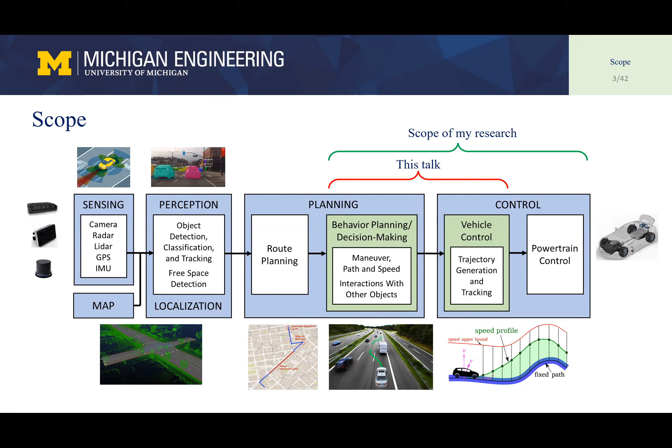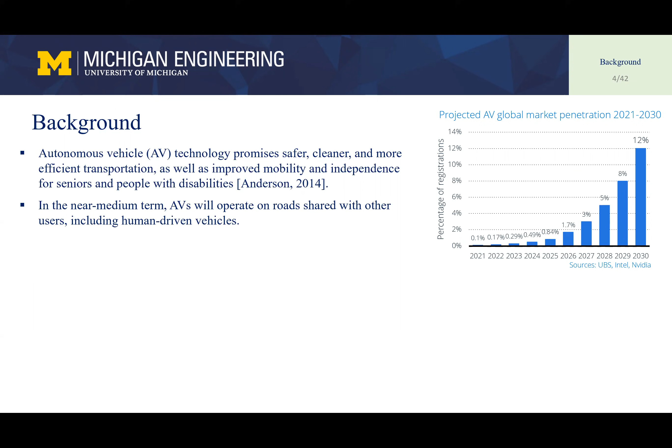Firstly, as background, autonomous vehicle technology promises to bring safer, cleaner, and more efficient transportation, as well as improved mobility and independence for seniors and people with disabilities. It is projected that in the near to medium term, autonomous vehicles will operate on roads shared with other users, including human-driven vehicles. In this case, the complexity and uncertainty due to extensive interactions among road users necessitate advanced decision and control systems that can properly account for these interactions to ensure safe and effective autonomous vehicle operation.

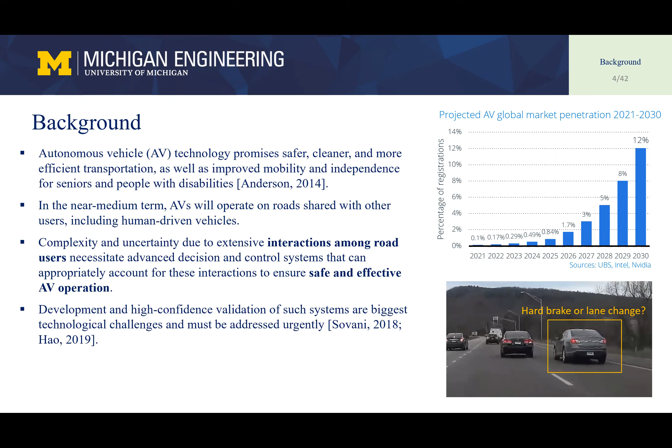Meanwhile, the development and high-confidence validation of such systems have been recognized by the automotive industry as among the biggest technological challenges and must be addressed urgently. In this talk, we will discuss game-theoretic methods for autonomous vehicle control. Firstly, game theory is the study of strategic interaction among rational decision makers, and we will apply game theory to study and model driver interactions in traffic scenarios involving multiple vehicles.

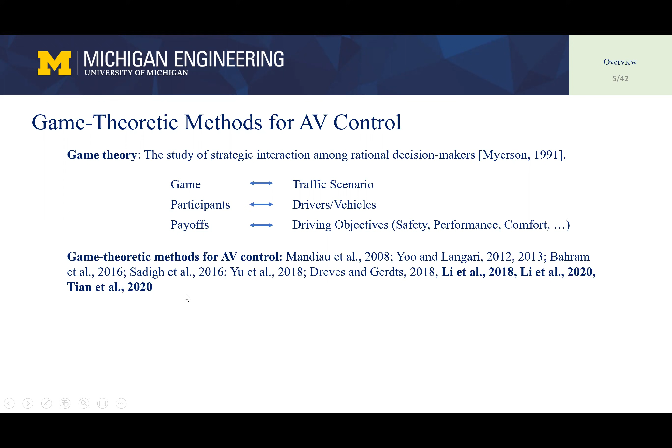Indeed, game-theoretic methods for autonomous vehicle control have been investigated by several researchers in these publications, including some publications from our group. Game-theoretic methods have several advantages, especially compared to pure data-driven or learning-based methods. Firstly, game-theoretic methods can typically lead to solutions that are interpretable, because these methods are based on mathematical formulation of the problem with certain psychophysical interpretation.

Secondly, game-theoretic methods can typically lead to solutions that are effective for a range of scenarios. In contrast, pure data-driven or learning-based methods typically lead to solutions that are effective for the specific scenario of the data set. And lastly, game-theoretic methods are typically data-lite, which means these methods usually require less data compared to pure data-driven methods. This is important because it has been reported that multi-vehicle interaction scenarios in released traffic data sets are insufficient, and this fact largely limits the practical application of data-driven methods, but in this case, game-theoretic methods can be applied.

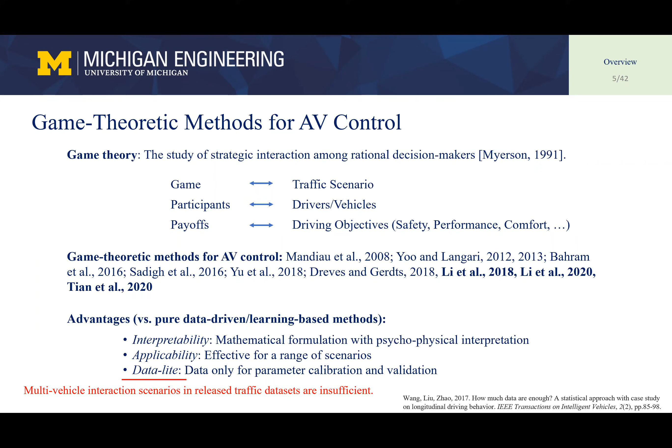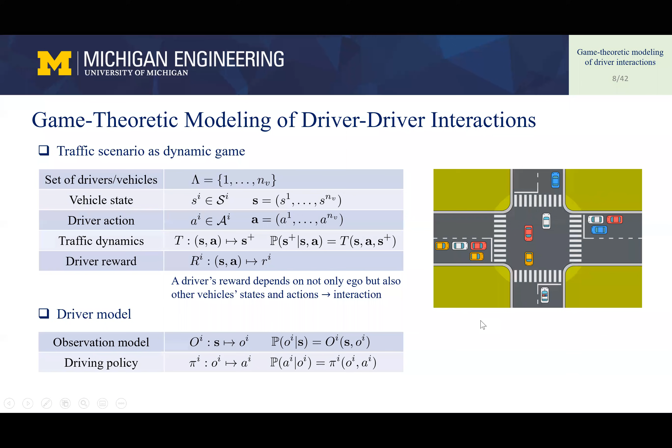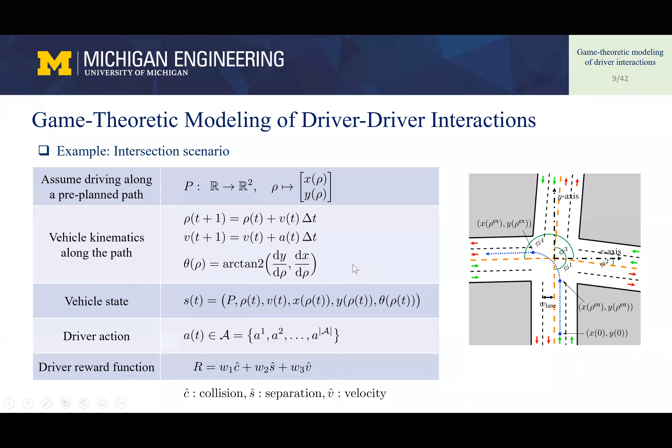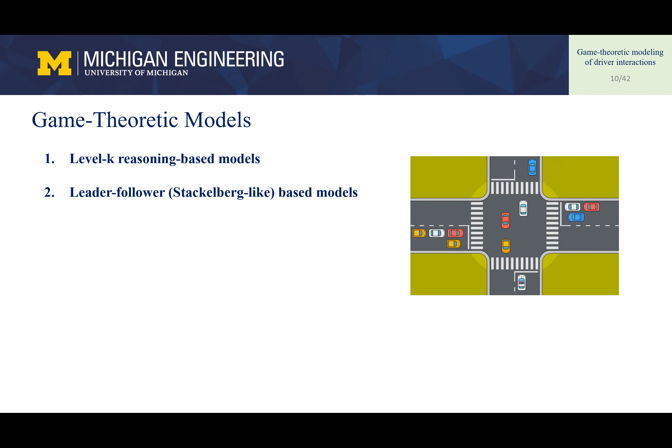All right, then let's discuss some specific game-theoretic models. In this talk, I will introduce 2 modeling methods. The first one is called level-k reasoning-based models, and the second is called leader-follower-based models, or Stackelberg-like models. I will introduce these 2 one by one. First, the level-k reasoning-based models.

Level-k reasoning is a behavior model describing human behavior in interaction scenarios. In level-k reasoning theory, human behavior is classified according to levels of reasoning. In particular, a level-k agent behaves as if she best responds to the belief that all the other agents are level k-1. So in short, a level-k agent optimally responds to level k-1 other agents. So this is the k assumption in level-k reasoning theory.

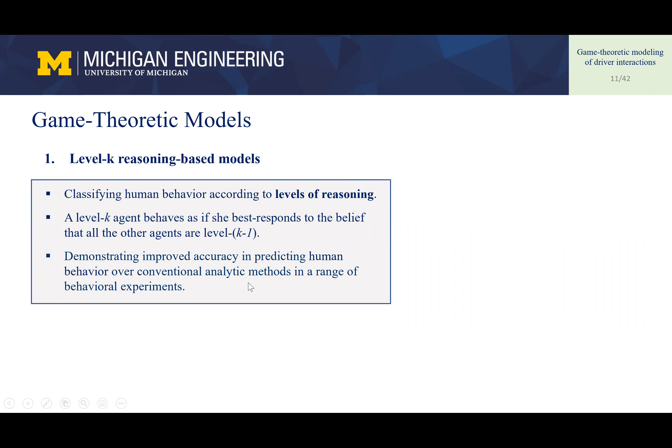Level-k reasoning theory has demonstrated improved accuracy in predicting human behavior over conventional analytic methods, including, for instance, Nash equilibrium-based methods in a range of behavioral experiments. Let's take this simple intersection scenario involving two interacting vehicles as an example. At first, vehicle B may choose to maintain its current speed and go through the intersection first. So this thought represents a reasonable driving behavior, but without really accounting for the interactions between these two vehicles. And this thought can be classified as a level 0 behavior.

Then A may think B will go first, and in this case, I should yield to B. And this represents a best response to the level 0 behavior of B and can be classified as a level 1 behavior. And B may continue to reason and think A will yield to me, and in this case, I can go ahead of A safely. And this thought represents a best response to the level 1 behavior of A and can be classified as a level 2 behavior.

So effectively, level 0 represents reckless driving behavior, i.e., reasonable driving behavior, but without really accounting for vehicle interactions. Then, as the best response to such reckless driving behavior, level 1 represents cautious or conservative driving behavior. And then, as the best response to level 1 behavior, level 2 represents relatively aggressive driving behavior.

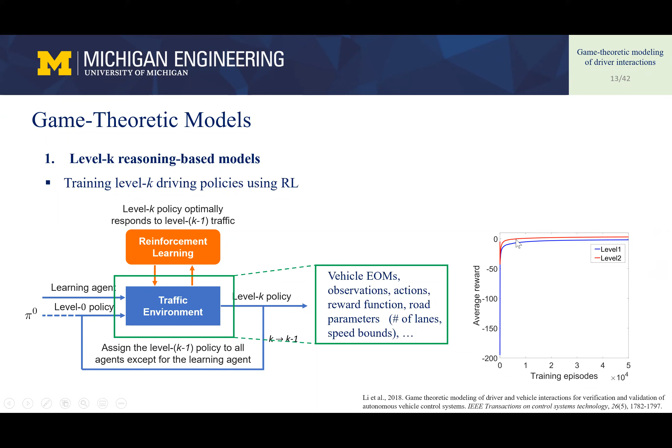And once we have level 1, we can feed it back into this traffic environment, i.e., we let all the vehicles in this environment be now controlled by this level 1 policy, put another learning agent in this environment, use reinforcement learning to train it, and obtain a level 2 policy. So following this loop and this iterative procedure, we can construct or obtain level K driving policies for K equal to 1, 2, 3, up to arbitrary level in an iterative and sequential procedure. This plot here shows the training results of level 1 and level 2 driving policies.

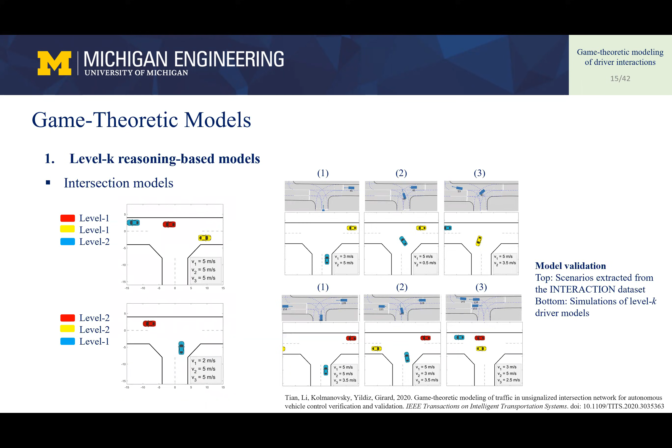All right, then let's move to the second modeling method, which is leader-follower based models. The motivation for this method is that in many traffic scenarios, a driver's behavior is dominated by her intention, whether or not to yield the right of way to others. For instance, at an intersection, which car goes first depends on their drivers' intentions to proceed ahead or to yield the right of way. And similarly, for highway merging scenarios, which car goes first usually depends on their drivers' intentions to yield. And motivated by such an observation, we exploit the leader-follower asymmetry in Stackelberg game theory to represent drivers' intentions. And in general, a leader represents a driver who intends to proceed, i.e. not yield, and a follower represents a driver who intends to yield.

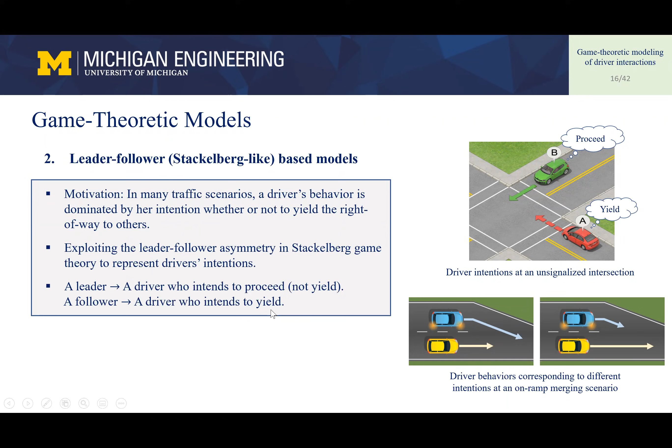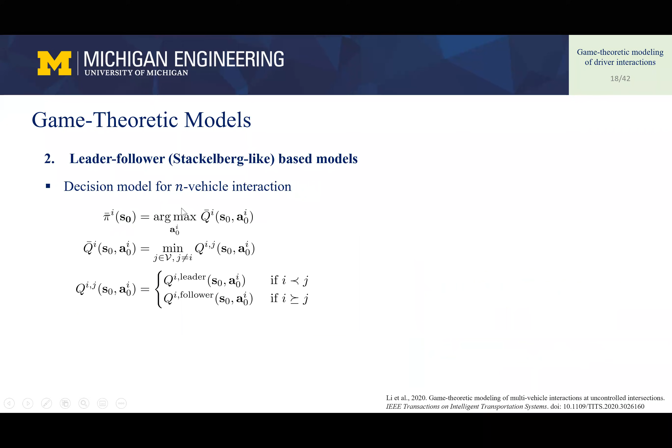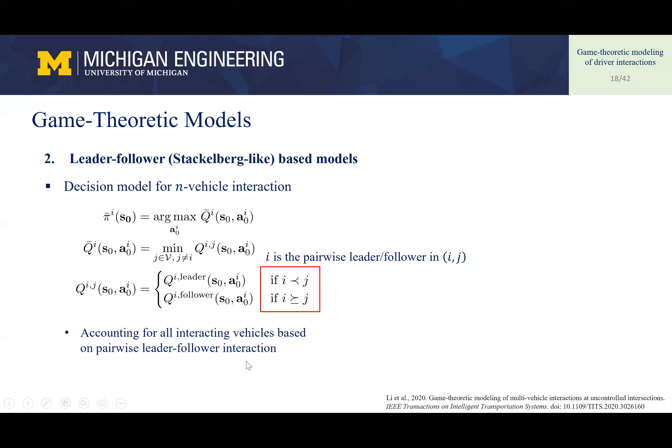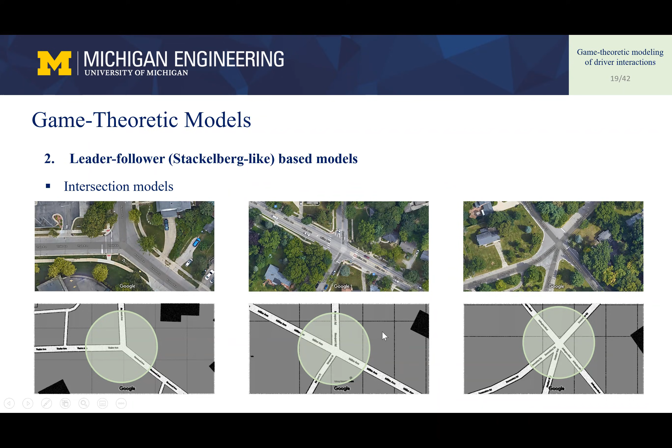Then we can extend the models to n vehicle interactions using this set of equations. Here, this i smaller than j represents that i is the pairwise leader in the vehicle pair ij, and i greater than j means i is the pairwise follower in this pair. And this model here accounts for all interacting vehicles based on pairwise leader-follower interaction. And using this model, we can successfully model and simulate the interaction among multiple vehicles. And here there are some pictures showing several real-world intersections in Ann Arbor, and we can reproduce these intersections in the simulation environment and use our leader-follower based models to simulate vehicle interactions at these intersections.

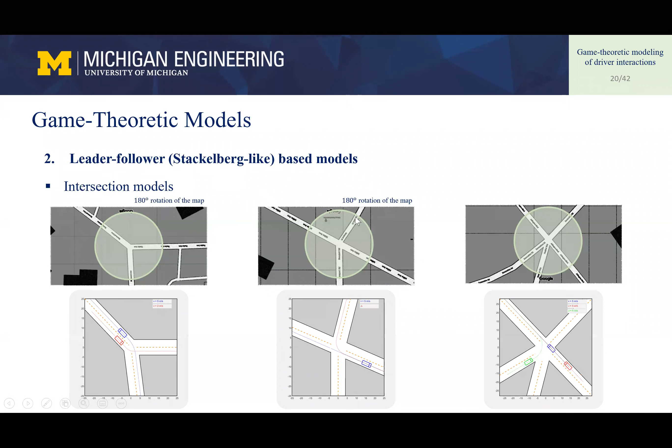All right, so we have introduced the LevelK reasoning-based approach and the leader-follower based approach for modeling driver interactions. Let's now compare these two methods. Firstly, LevelK models focus on the representation of the heterogeneity of driver behavior due to different driving styles. Recall that level 0 represents reckless driving behavior, and level 1 as the best response to such reckless driving represents cautious and conservative driving behavior. And as the best response to level 1, level 2 represents aggressive driving behavior. And in this case, the LevelK models may be most suitable to be used for scenarios where a driver's behavior is largely influenced by her driving style, such as on highways.

In contrast, the leader-follower based models focus on the representation of the heterogeneity of driver behavior due to different interaction intentions. Recall that a leader represents a driver who would like to proceed, not yield, and a follower represents a driver who would like to yield.

And in this case, the leader-follower models may be most suitable to be used for scenarios where a driver's behavior is dominated by her interaction intentions, such as at intersections or forced merge scenarios. Combination of both methods may lead to further improved models, and this is being currently investigated.

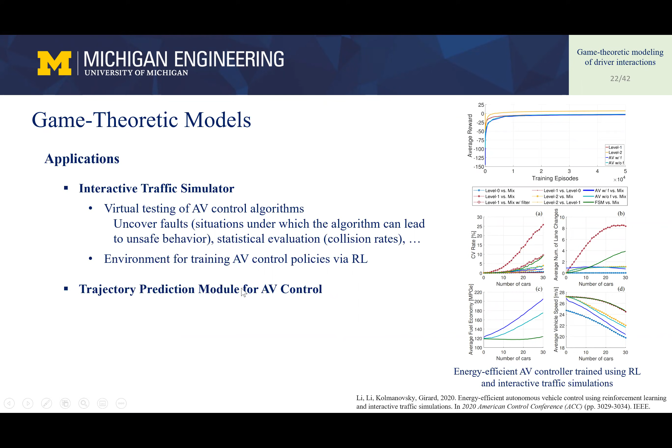And lastly, such models can also be directly used in trajectory prediction modules of autonomous vehicle control systems. And I will discuss this application in more detail in the second part of this talk, which is interaction-aware autonomous vehicle control.

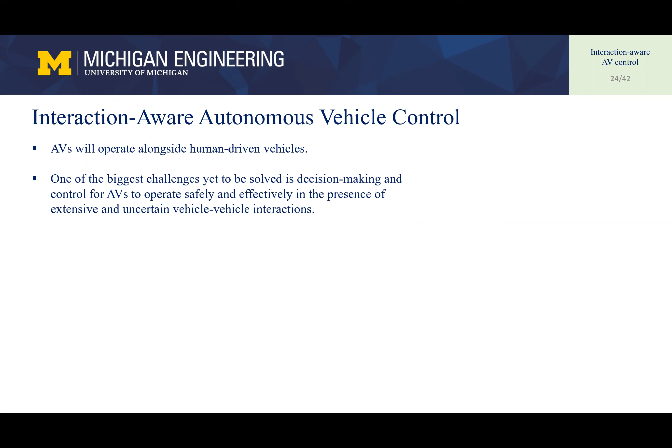Recall the background. Autonomous vehicles will operate alongside human-driven vehicles, and one of the biggest challenges yet to be solved is decision-making and control for autonomous vehicles to operate safely and effectively in the presence of extensive and uncertain vehicle-to-vehicle interactions. This motivates the development of an interaction-aware autonomous vehicle control framework, which is based on integration of the previously developed game-theoretic driver interaction models with Bayesian inference and model predictive control.

This framework has several advantages or features. Firstly, this framework leads to control solutions that are interpretable, because in this framework, we use game-theoretic driver models for trajectory prediction. Secondly, in this framework, we online quantify interaction uncertainties and reduce such uncertainties based on observed trajectories and Bayesian inference. And lastly, and maybe most importantly, this control framework leads to solutions with an explicit probabilistic safety guarantee under such interaction uncertainties.

Firstly, we consider an MPC-based control strategy for the autonomous vehicle. The autonomous vehicle optimizes a sequence of actions to maximize the expected value of the cumulative reward over a certain horizon. So this cost function represents driving objectives. And this optimization is subject to traffic dynamics, which can be described by the transition model capital T introduced previously. And this s_t represents a measurement of the current state.

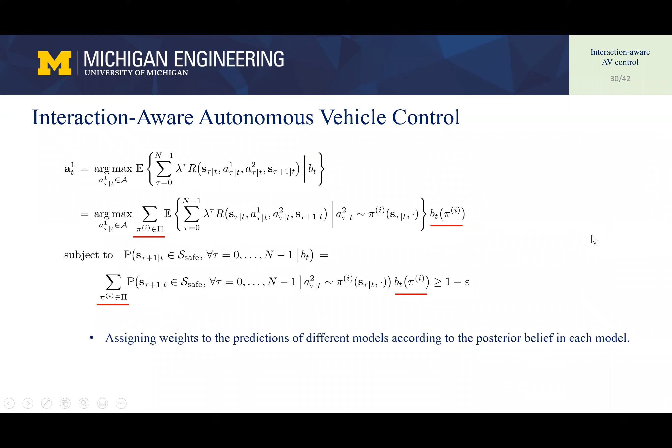Now, let's look at whether this control framework works. So for this, we consider a case study which represents a highway on-ramp merging scenario. Highway on-ramp merging is a quite challenging scenario, even for human drivers, because such scenarios typically involve extensive interaction between multiple vehicles. To implement our control approach, we consider the three nearest vehicles as interacting vehicles and assume all other vehicles drive at constant speeds.

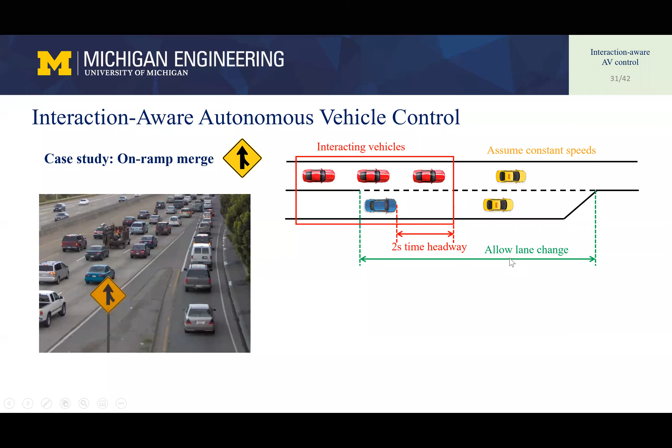We consider a reward function as a linear combination of 5 terms, which represents a penalty for collision, a penalty for going off-road, some reward for maintaining reasonable separation from other vehicles, some reward for approaching the target lane, and some reward for maintaining a reasonable velocity. We also consider some constraints on the speed and maximum acceleration.

And in our MPC problem, we consider a planning horizon which corresponds to 4 seconds of look-ahead time. And we update our decision at a frequency of 4 Hz, which means we re-solve the MPC problem and update our control decision every 0.25 seconds. And in this example, we use the leader and follower models to represent the interaction behaviors of these interacting vehicles. This means we consider a model set consisting of 2 models, which are leader and follower models.

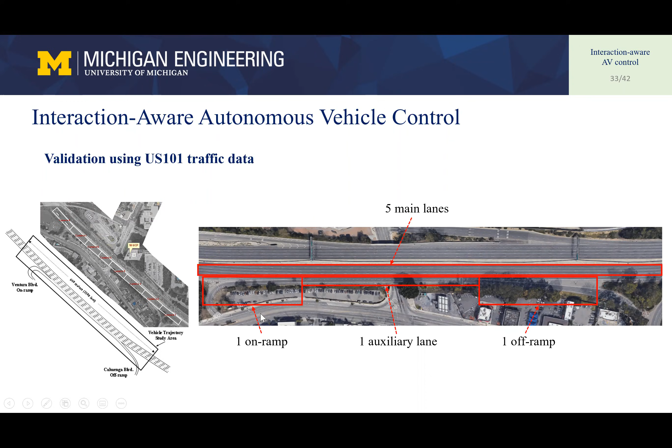So we identified in total close to 200 merges at this area, and our controller succeeded in merging in 193 cases and failed in 5 cases, which corresponds to a success rate of 97.5%. This success rate is pretty good because this data set represents quite busy traffic involving many vehicles. So this is a challenging scenario even for human drivers, and our controller can succeed in most merging cases.

In particular, our validation method is to replace the merging vehicle in the data set with a vehicle controlled by our controller and let all other vehicles drive following their original trajectories in the data set. Then let's look at some specific success cases. In this first case, the driver in the original data set decides to merge behind vehicle 2, which is probably a big truck. And our controller also decides to merge behind vehicle 2.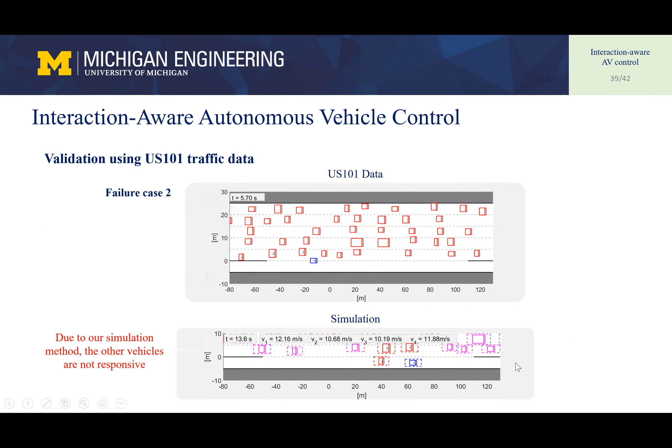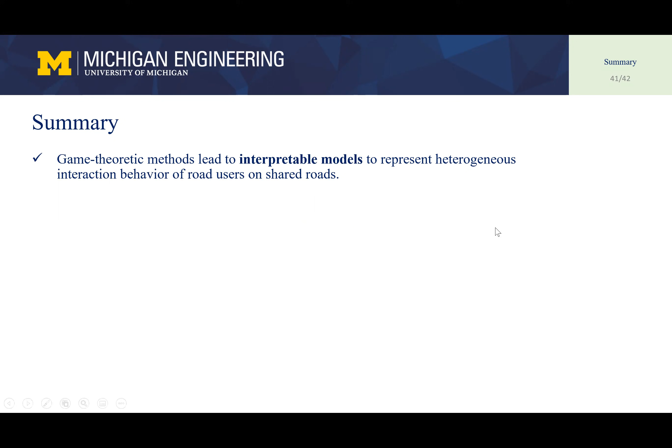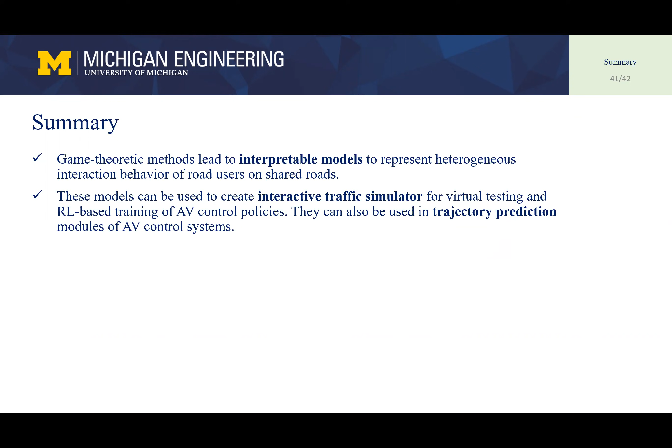All right, so we have introduced the interaction-aware autonomous vehicle control framework. Let's now try to draw some summaries. Firstly, in this talk, we showed that game-theoretic methods can be used to generate interpretable models to represent heterogeneous interaction behavior of road users, in particular vehicles on shared roads. And these models can be used to create interactive traffic simulators for virtual testing and reinforcement learning-based training of autonomous vehicle control policies. They can also be used in trajectory prediction modules of autonomous vehicle control systems.

And we have developed an interaction-aware control framework for autonomous vehicles on shared roads by integrating the game-theoretic models with Bayesian inference and MPC. And in this framework, interaction uncertainties are explicitly accounted for. And this framework leads to control solutions with an explicit probabilistic safety guarantee. And the last remark is game-theoretic methods can be quite useful, and they can also be applied to other multi-agent and human-robot interaction problems beyond autonomous driving.

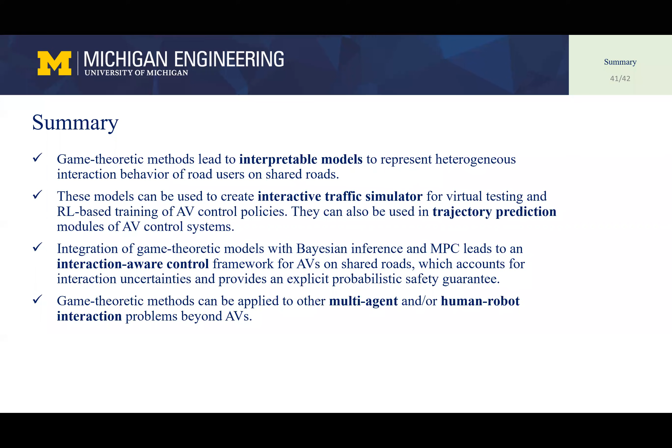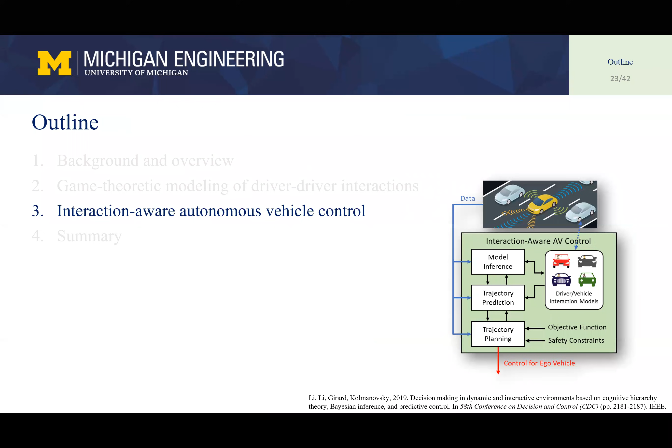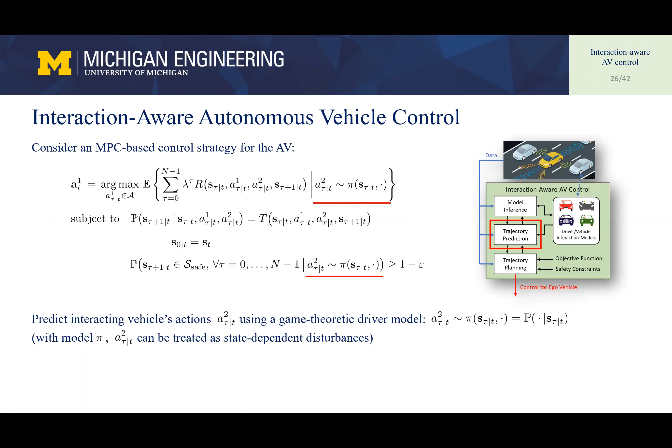Let me see. The first part or the second part? I think it was in the second part when you were showing the Bayesian update when you were doing the prediction of the trajectories. I see. This? There was another diagram, maybe, yes, here. So how do you parameterize? Yeah, I think I was referring to the next slide, but it's the same. I see. These models are represented using a neural network.

So it's basically a stochastic map from the state to the distribution of actions, and we use a neural network to represent a model, and the inputs to the neural network is the current traffic state, and the output is a distribution of actions.

But how do you discretize the space of the models, when you have the belief over the models of the others? So in this approach to parameterize the models, we do not need to discretize the space, but we need to discretize the action space. Okay, and then you put the belief on the actions. Yes.

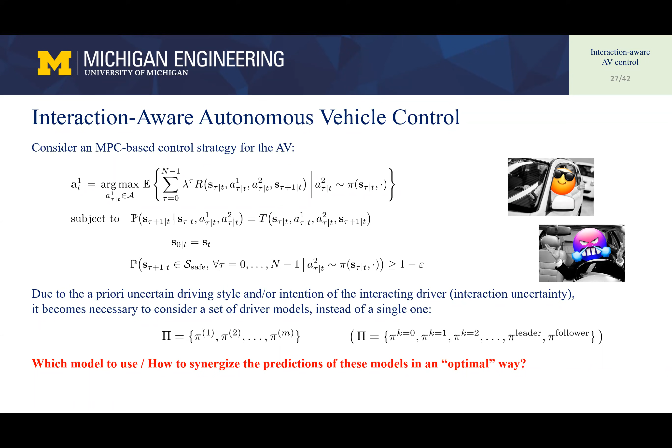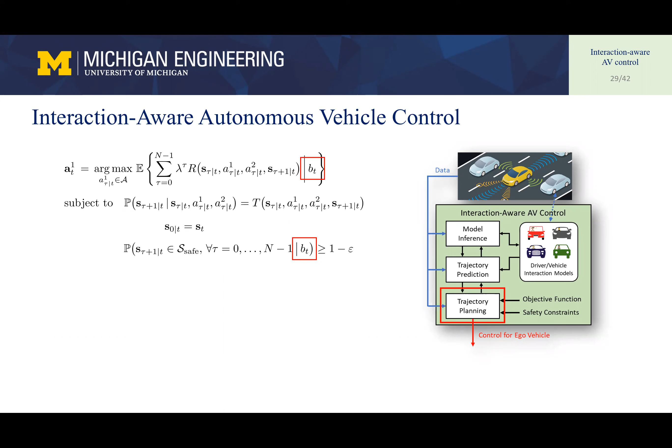Thank you. Now, the second one was really related to the last part of your talk, where you were showing this testing of the controller on passive data, which you said at the end is to some extent limiting because you're testing an interactive controller on data that are fixed or static. Yes. So what do you think could be a good testing framework for these kind of things?

So our current thought is to let the nearest vehicles that may have relatively extensive interactions with us be controlled by some other driver models, for instance, some car following models. So in our current validation approach, generating these results, we let all the vehicles follow their original trajectories, and this means they are not actually interacting with us.

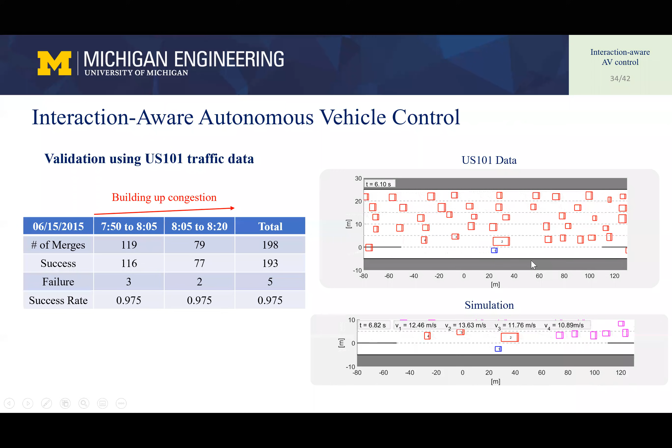But next, we would like to first initialize the scenario according to the positions and velocities of these vehicles in the data set, and then we let the nearest vehicles be controlled by some driver models, for instance, car following models, so that they can react to our actions. Okay, thank you. Yeah, thank you.

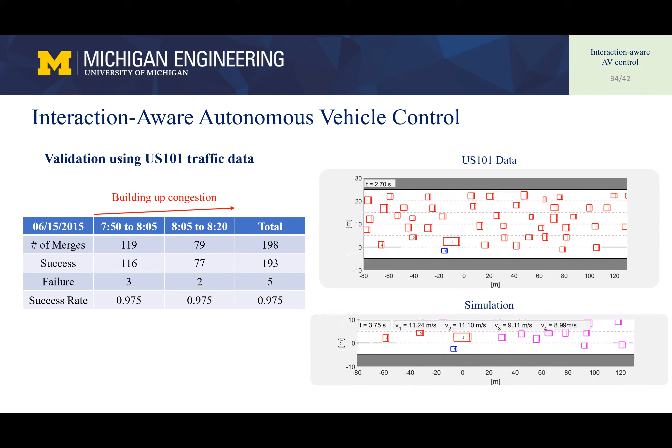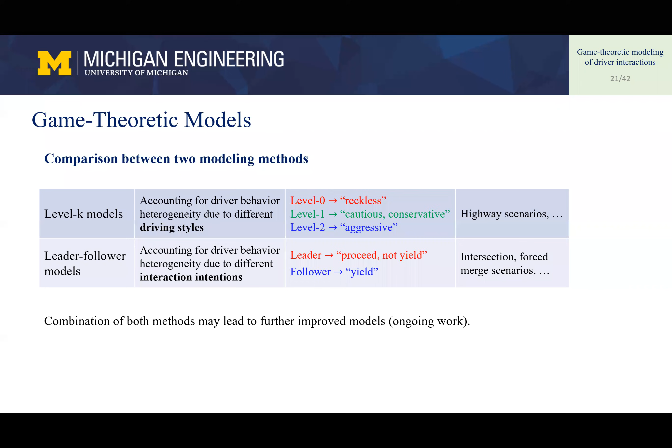Any other question? I have a question. Sure, please go ahead. In regards to the Level-K reasoning, if you can go back to that one. Yeah. So what is the difference between that and terminating best response early, like an iterated best response?

The idea is similar, but the specific solution will be different. This slide is good. So that's the procedure of how you get it. Sorry, I missed your second sentence. Can you repeat it? So this equation is the procedure of how you calculate the K-level policy. Yes. And so the Level-K policy looks like best response iterations. So can you comment on the difference?

So maybe the biggest difference is, if we look at this formula here, the actions of the interacting agents are feedback. So they take actions according to some feedback policies, which means their actual actions will respond to our choice of actions. But based on my understanding, if you do iterative... what's it called? Iterative best response on the policy level, not on the action level. So it would also be best response on the others' policies.

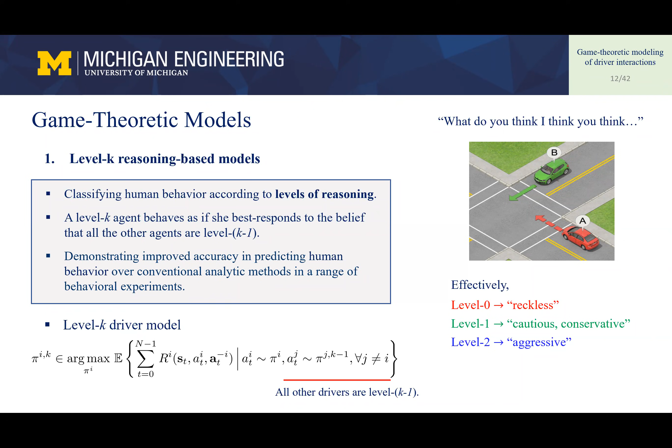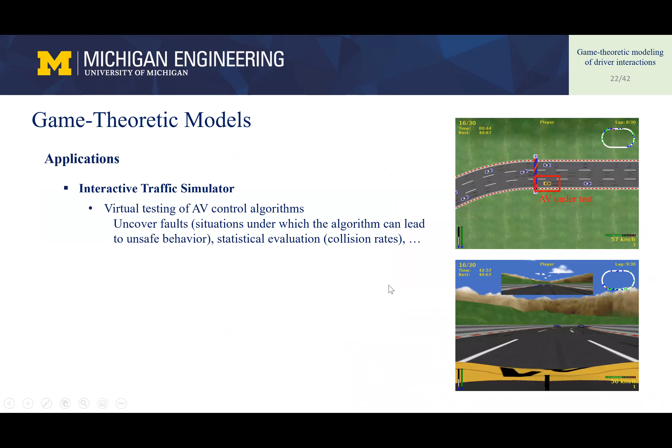Thank you. Right, then there is a question from Jason Heath that asks, have you proved stability guarantees for the combination of the different models? Is this question related to the control framework in the second part? I can ask Jason to either unmute or specify via the chat. Oh, it says yes. Okay.

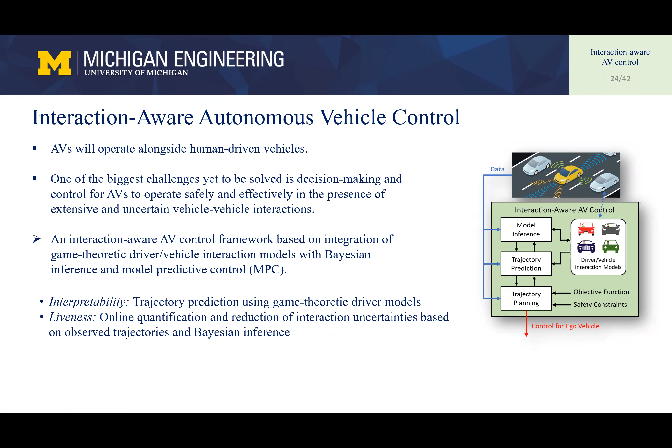So here, although we refer to this approach as a control approach, actually it deals with high-level control, or actually the decision-making level. So in this case, we do not investigate stability of this controller in detail. The action here basically represents a reference trajectory, and we will use lower level controllers, for instance, trajectory tracking. And in that case, we need to handle stability. Does this answer your question? Yes, it says thank you.